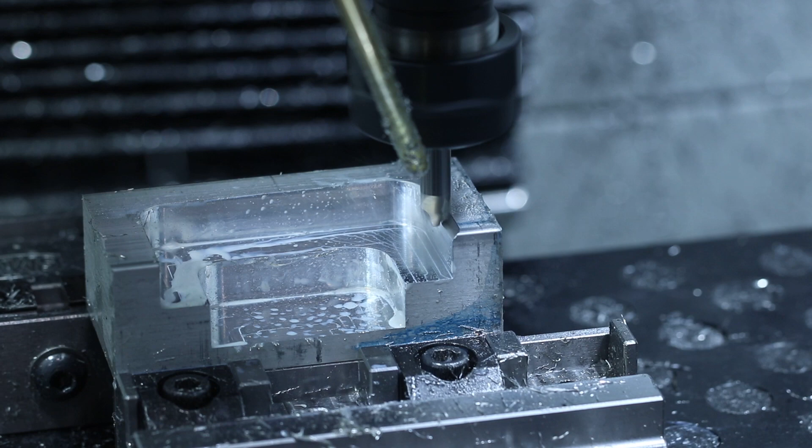Hi folks, corner rounding end mills. Let's show how to use these tools. Let's talk about where you can purchase them, how to set them up, how to program them, some CAD and CAM, and just overall usage tips to get the results you're looking for.

There seems to be a decent amount of fear about using corner rounding end mills. And to be fair, they can be tricky to use. The reason is that we're asking that tool to do so much more than a traditional cutting tool. For example, if we're facing this part across the top, we're just asking it to cut along a flat profile and in one dimension. Likewise, a traditional end mill, we're asking it to, say, clean up, adaptive, or finish this sidewall.

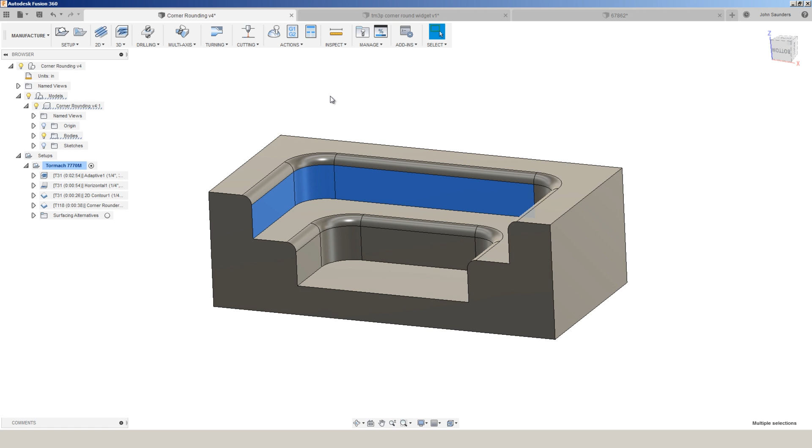Now, fun fact, most of us, when we do something like machine and finish a sidewall, we don't necessarily realize or even care about the fact that there may be a slight amount of taper along that line. If you have any friends who are, say, aerospace machinists, go ask them. Say, hey, how do you deal with taper on long sidewalls or parts where you're doing significant amounts of webbing and material removal? It'd be interesting to see what they say.

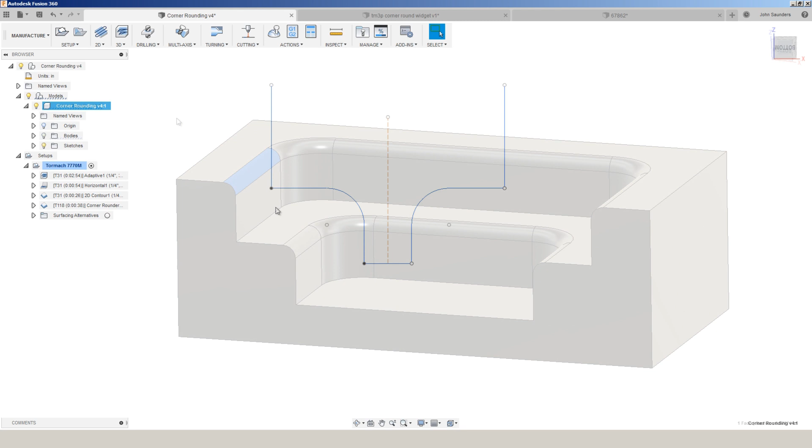But that's part of what makes a corner rounder tricky. We've got a 1/8 inch radius right here, and if we want to machine that with a tool, that tool has to be perfect along the top of our part. It has to be perfect at the tangency point. It has to be perfect radius, perfect again at the tangency point, and then perfect along your sidewall.

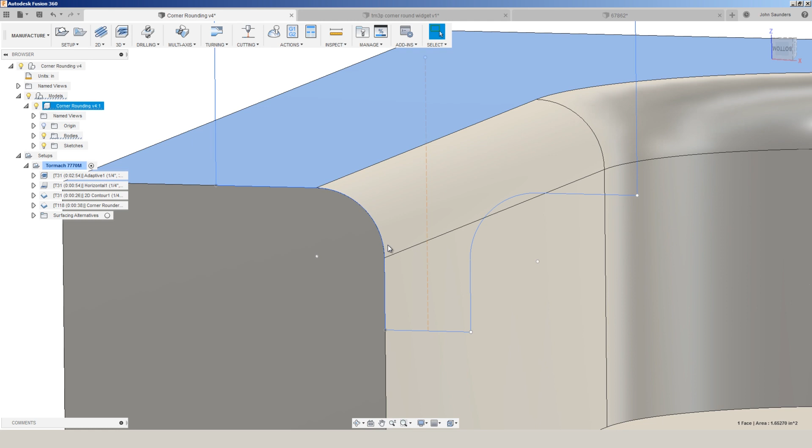And we have to measure the tool perfectly with both correct Z height and minimal runout so that we can move that tool along and machine this face here without a burr or problematic blend line as it meets these two other faces. So how do we make that a little easier?

First off, if possible, stack the deck in your favor by letting the tool that you may have on hand drive your feature size. In other words, let's say you have a 1/8 inch radius tool. Well, see if you can adjust your CAD file to match that existing tool. These tools can be expensive, and as you learn a specific tool from a specific manufacturer, you'll get a little bit better at it. So it's a rare case where we want to let the tools that we own or like drive our CAD model. Normally it's the other way around. Normally we have a CAD model and that dictates the tooling that we use.

On that note, like most modern carbide tooling, they come with various coating styles. Coatings can be amazing things for helping with tool life, especially in more exotic materials. But generally speaking, unless I have a production or really application-specific use, I prefer to own tools like corner rounders and other specialty tools uncoated because it lets me use them on any material.

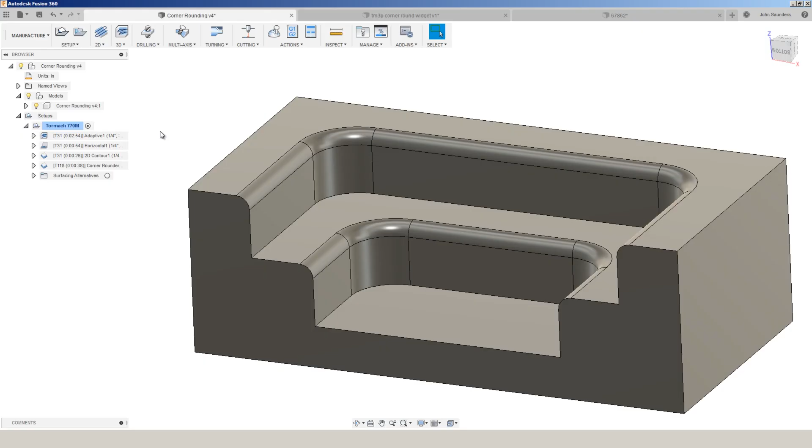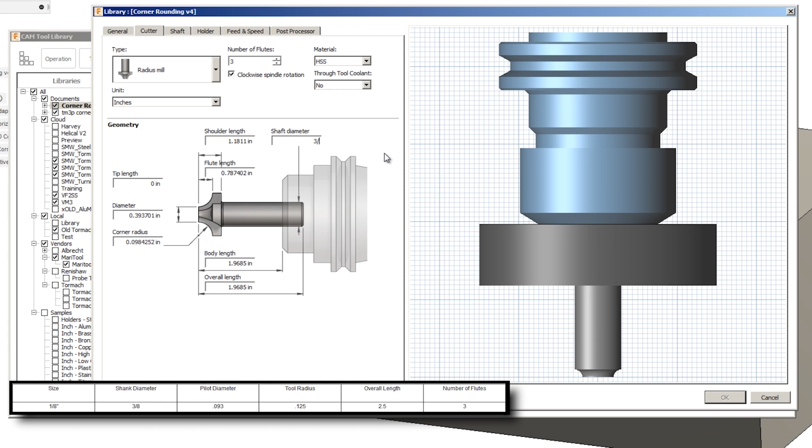So how do we model up the tool in Fusion? We'll go to Tool Library, add a new tool. Under type, it'll be a radius mill, and we'll pick this 1/8 inch corner rounder from Maritool. Shank diameter is 3/8 of an inch. It's a 1/8 inch radius, but the pilot diameter, and that is the diameter of this center tit, is 0.093 or 3/32. Shaft diameter, it was 3/8. Diameter of the tit, I'm going to type in 3/32.

Corner radius 0.125. No tip length, that would be what extends beyond the tip. Normally that should be 0. Body length we'll just say is 1/2 inch. And then the shoulder length and the flute length are both 0.125. So we've got that tool modeled up.

Now, one of the things that makes these tools so difficult to use is reconciling the accuracy of the tool as well as your ability to measure that tool. So again, we measure the height of that tool by touching off on the face of the tool. That would be this surface right here. And what that means is that the distance between the face of the tool that we're measuring and the top of the cutting edge is incredibly important. And a human fingernail can easily pick up 1/1000th of an inch difference here.

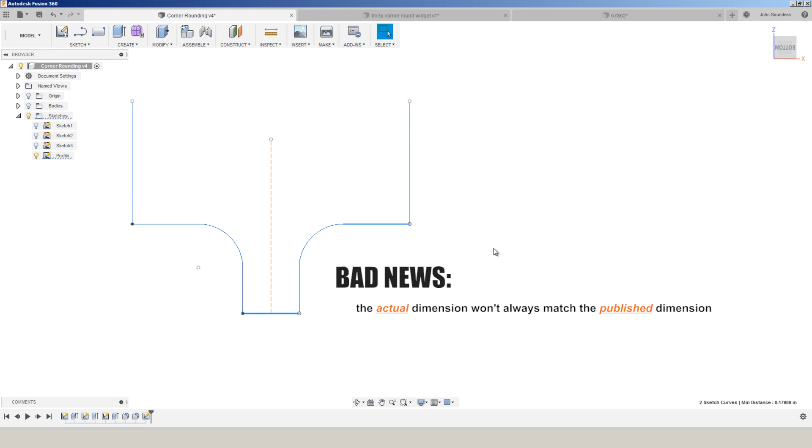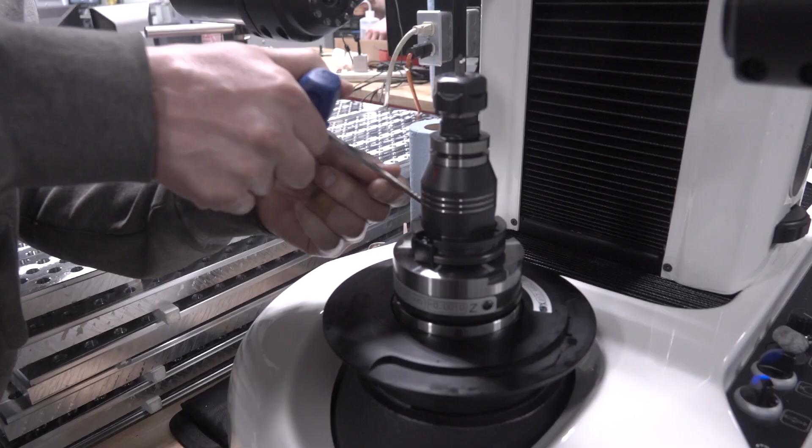And here's the bad news, and probably the reason that corner rounders have a reputation of being difficult to use. The actual dimension of this tool isn't always going to match the published dimension. So how do you fix that? Well, two different ways. Number one, if you have access to something like a tool presetter, an optical comparator, or a measuring microscope, you can measure this prior to using the tool and get a much better idea for how accurate the tool is.

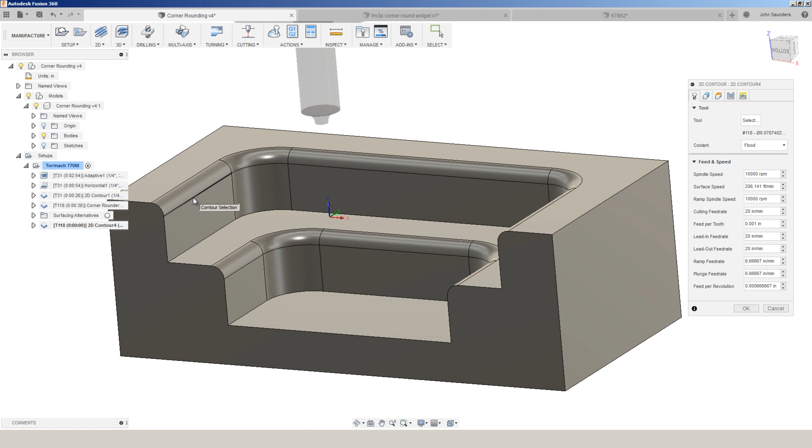Absent that, your best bet is to walk the tool in. In other words, let's assume that the tool is incorrect and we're going to walk it in. And we can do that by staying off these two faces. So when we go to Program, we'll pick a 2D contour. We'll pick our tool as this 2mm. I'm going to left click once on this line. Now I want this full contour selected.

It's one of the few workflows I really don't like in Fusion that I wish they would improve. You could keep clicking around, but that's going to be adding multiple chains. It should just be one chain. So left click once on the line that we want. Now left click on that line again and let up on your mouse. You'll see this new thing pop up.

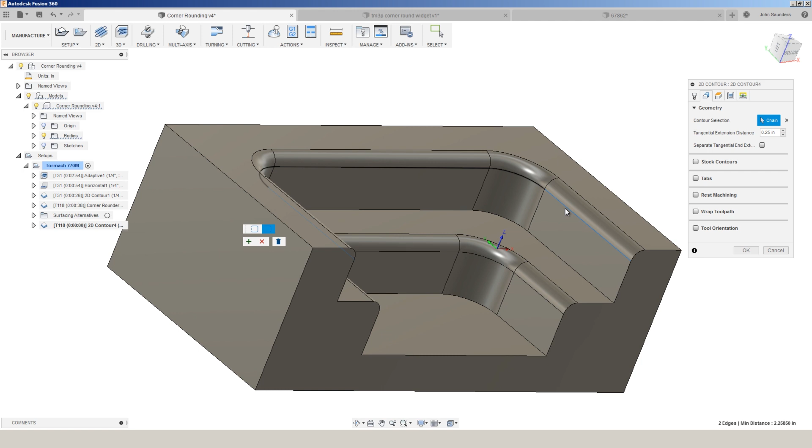I'm going to orbit over to here, not using my space mouse. Click right here. It's a little bit hard to see. The original line that I clicked was blue. The piece that I added is black, ending in blue here. Click the green plus to accept that new selection. And now we've got a single chain that represents the full profile that I want. Click OK. Simulate that tool.

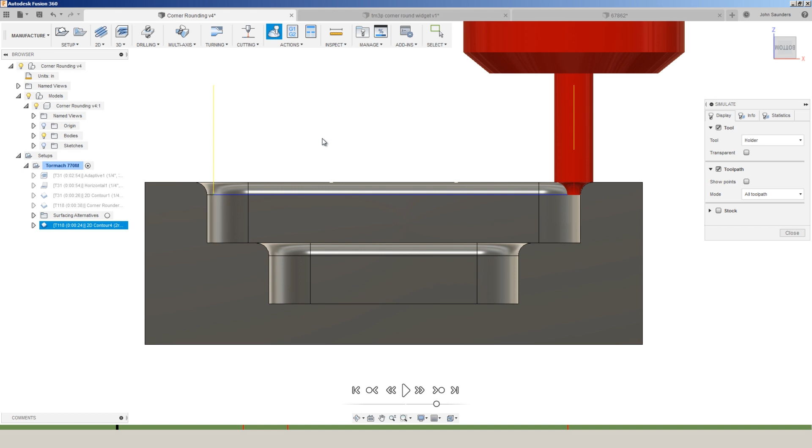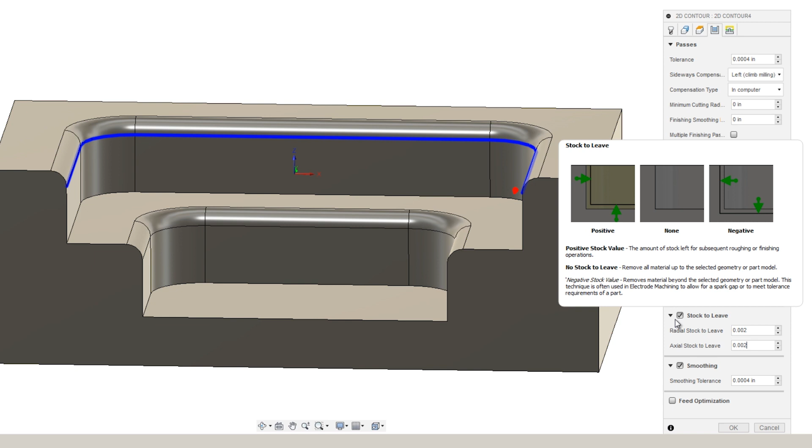By the way, left click and drag left to right on your screen, and you can slow simulate as you want, kind of scrubbing through it. What that's going to do is a quote-unquote perfect toolpath, presupposing that that tool was ground perfectly and that it was set up and measured perfectly. We don't think that's the case, so we're going to edit, passes, stock to leave, and say leave 0.002-inch axial and radial. We simulate that now. You can see we're staying off both left to right and top to bottom. Take a couple of passes and walk that tool in.

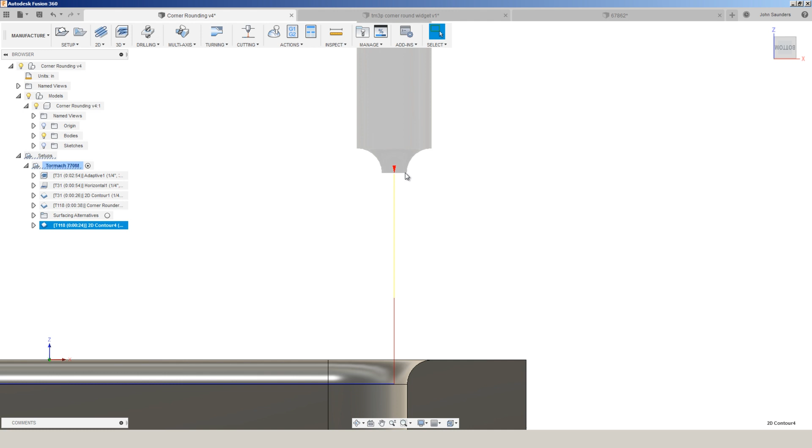Speeds and feeds are otherwise quite similar to a normal end mill or normal cutting tool, keeping in mind that your cut diameter varies from the outside of the pilot up to the outside of the cutting tool. Aluminum is quite forgiving, which is what we did in this case. Generally speaking, you're going to be able to use your maximum RPMs, and something like 1/1000th of an inch feed per tooth should get along just fine. Harvey has some really good resources. We'll come back to them in a second.

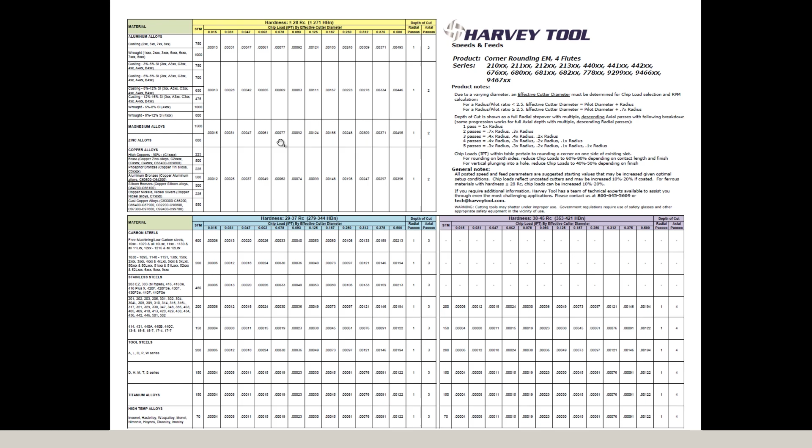If we take a look at their speeds and feeds worksheet, this looks a bit overwhelming, but what I really wanted to highlight here is this section here, which reads, depth of cut is shown as a full radial step over with multiple descending axial passes. So it's a little bit of a mouthful. All that they mean there is that if you're going to take multiple passes, do so in a decreasing amount.

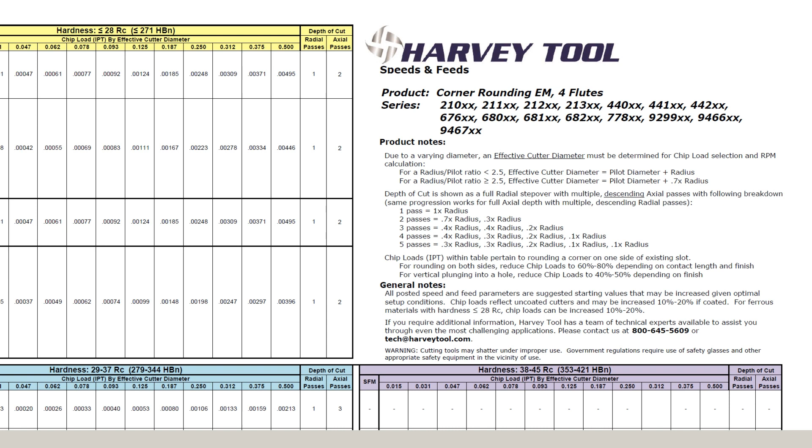So this does not speak to any potential inaccuracies of the grind on the tool or setup or needing to walk it in, but rather, in this case, we just took one pass. We're assuming we can take the full cut. And for aluminum, the Tormach and the Haas had no problem doing that. If you're going to take multiple cuts, what they recommend would be something like choosing multiple depths, we'll say 0.02, where you'll see it now takes multiple step downs.

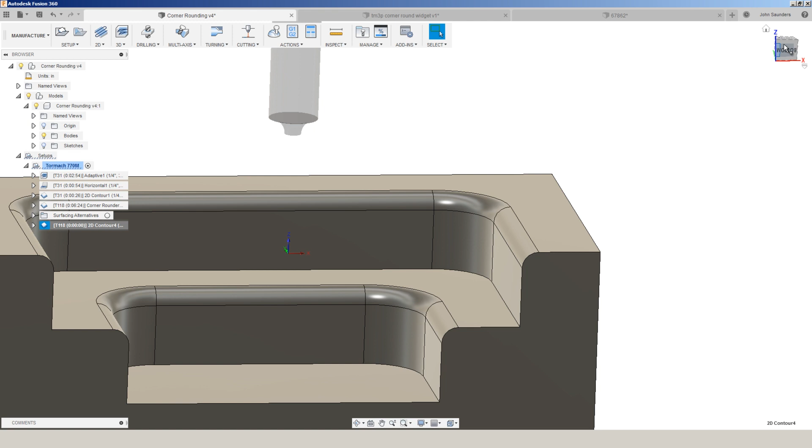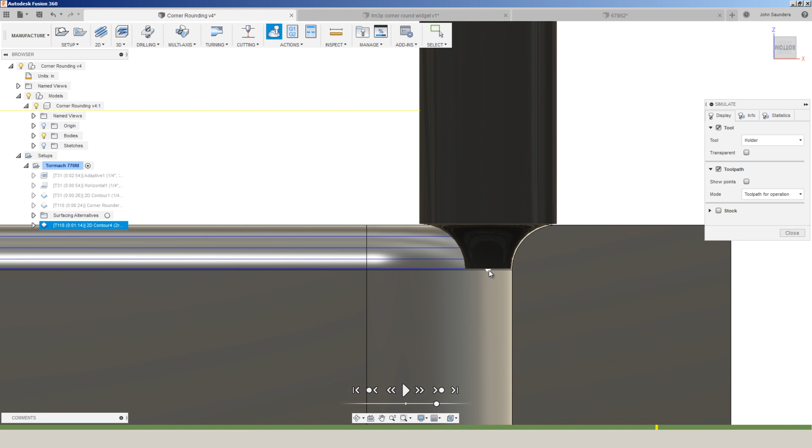So it's the full left to right or width engagement, but each step down, you're taking more axially, except what they want you to do is take a little bit less with each depth of cut. With each depth of cut, you're actually engaging significantly more of the tool. So if you're familiar with, say, single point threading with a 60-degree insert, as you move that tool in, you're actually contacting more on each side of the tool, hence the decreasing steps. And you can do the same thing if you came in from the side, left to right. Keep it all in one axial depth, but come in progressively smaller on your widths of cut.

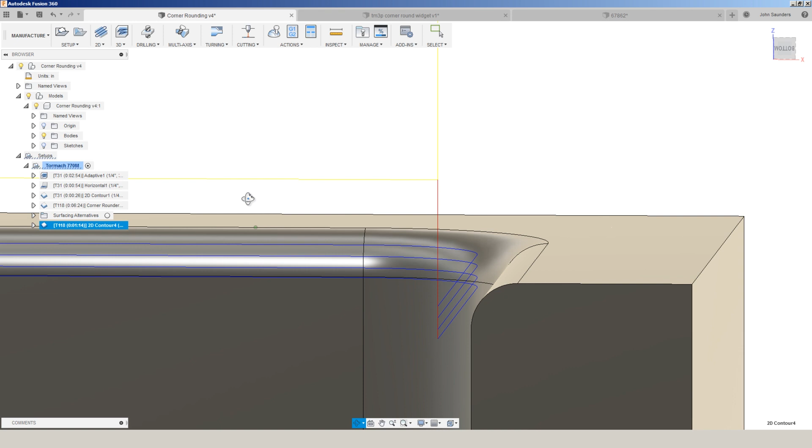When you're buying a corner rounder, keep in mind that that center point, which they call the pilot, is really important, because if you want to reach into a small hole or into a tight inside radius, you need a really small pilot. This is a pretty open feature, so no problem here. If these were to start to get smaller, you'll need a really small pilot diameter.

Lastly, one of the coolest things that can help save your butt and kind of undo all the hassle I just went through is looking at flared corner rounding end mills. Flares add a little bit of forgiveness on each end of the tool to help blend that feature in, which is kind of funny because it's kind of the toolmaker's way of saying these could be a little bit tricky to measure or set up.

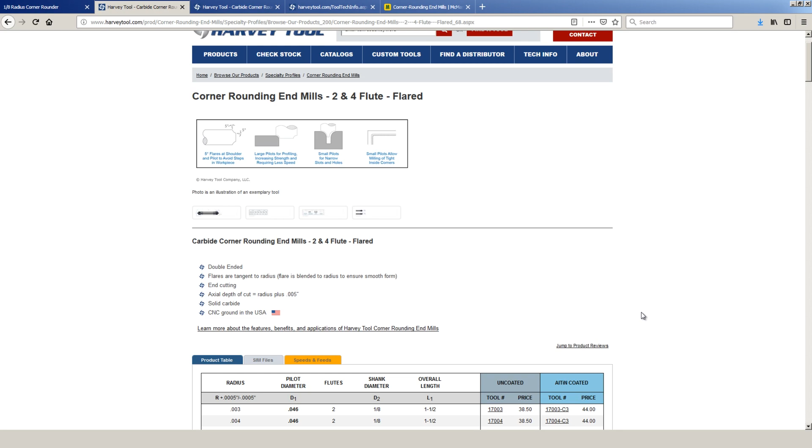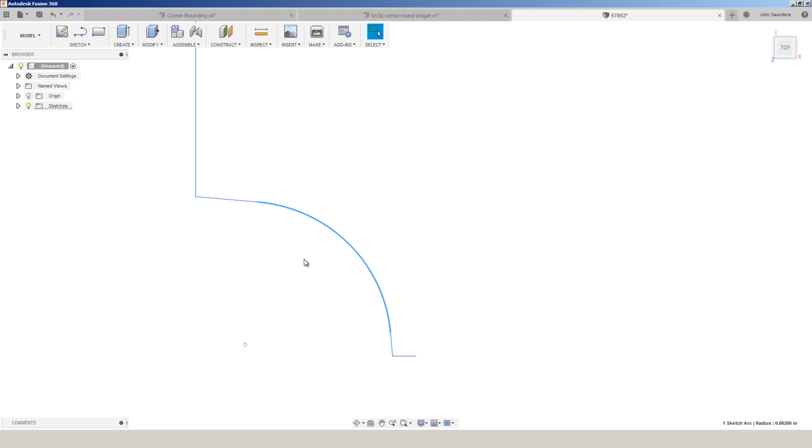And I grabbed one of the Harvey tools here. They offer DXF files under the SIM files. I downloaded that DXF file, and you can see in Fusion here, that is, in this case, the 1/16 inch radius of the tool, but instead of having lines that extend tangentially directly off that radius, you've got a little bit of an extra lead in, lead out.

We filmed these two different test pieces specifically for this video. One of them was on the Tormach 770, the other was on the Haas TM3P. And honestly, they both looked great. No demonstrable difference between the finish on the two. The one on the TM3 I thought was kind of a cool, almost like an Art Deco part. I think it was actually off of a camper that Ed had as a kid, or had gone camping with his family as a kid.

And it's another good use case for what you can do with the corner rounders, which is they don't just have to be an alternative to a fillet. In this case, we're actually using them to create a full radius profile on the top of the part. And the alternative is to use surfacing toolpaths. Fusion does a great job.

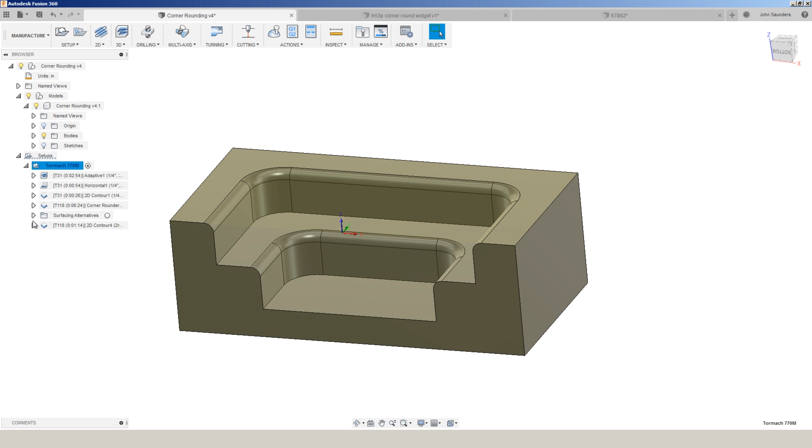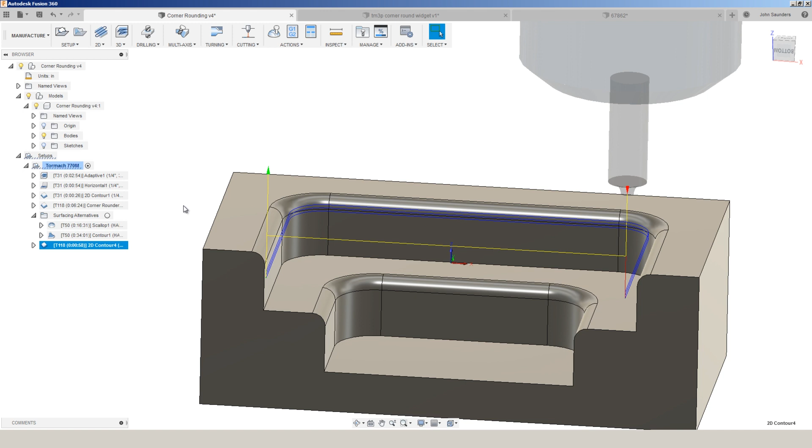We could do either a scallop or a contour to create a surfacing toolpath with a ball nose end mill to run along that. And the time that this operation takes is very dependent on your scallop height or your step down, but nevertheless, you're looking at something like 16 to 34 minutes for a relatively normal step down versus under a minute for even a multi-pass operation with a corner rounder.

Here, Ed didn't model the corner rounding in, but that's fine, no big deal. You're still choosing the same geometry line, and all we're doing under height is setting the bottom height to be the radius of that cutting tool. And this tool was 2 millimeters, so it should have been negative 0.0787. And you'll notice it's just a hair more. And that is what we had to dial in to get that blend just perfect.

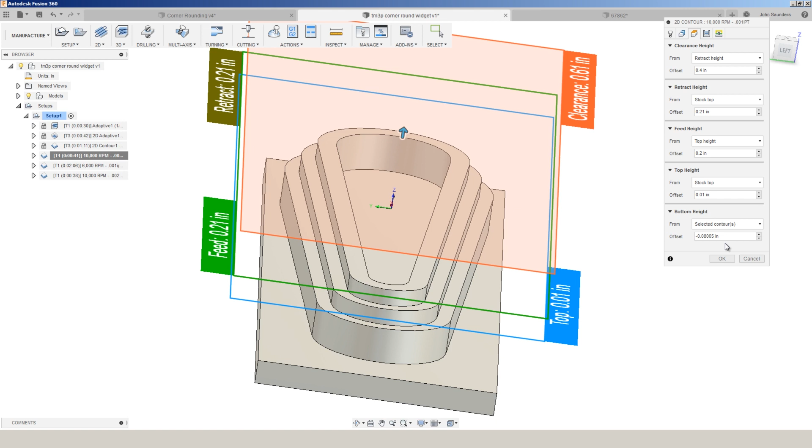Once you do that, do yourself a favor and write that on a piece of paper with that specific piece of carbide, and it should repeat for you. The other thing that we did was we tested the difference between 1/1000th of an inch feed per tooth on this top profile and 2/1000ths of an inch on the bottom.

And you should see a difference because feed per tooth is simply your feed forward line. How far is the cutter progressing with every rotation? So the further that distance is, the more of a scallop or scoop effect there should be in your part. We'll try to show this on camera here, but we couldn't see a real difference. And that can be a real time saver because you're able to literally double your feed rate or cut your cutting time in half. Hope you folks learned something.